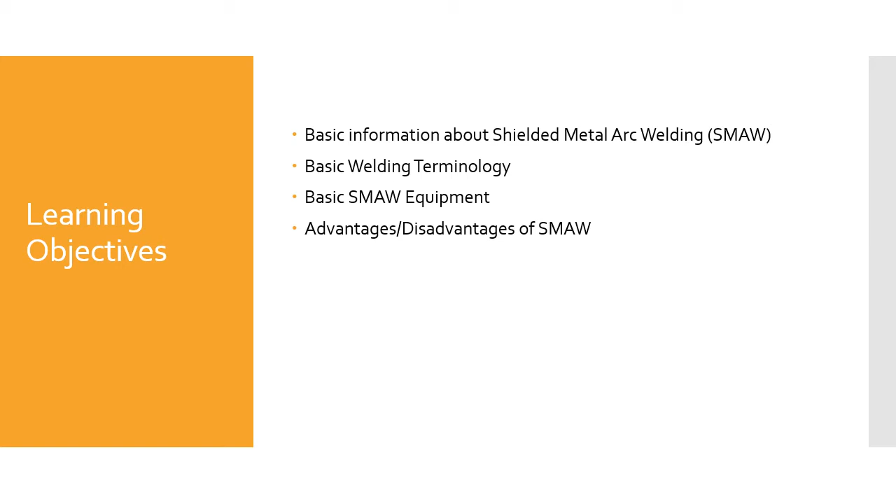The shielded metal arc welding process is one of the older processes. Tried and true, very portable, very easily adapted to a lot of situations for shipbuilding, construction, repair, pipelines, power plants. There are advantages and disadvantages to shielded metal arc welding, but when a lot of people think of welding, this is what comes to mind because it is so versatile and so readily available and so well used as a process.

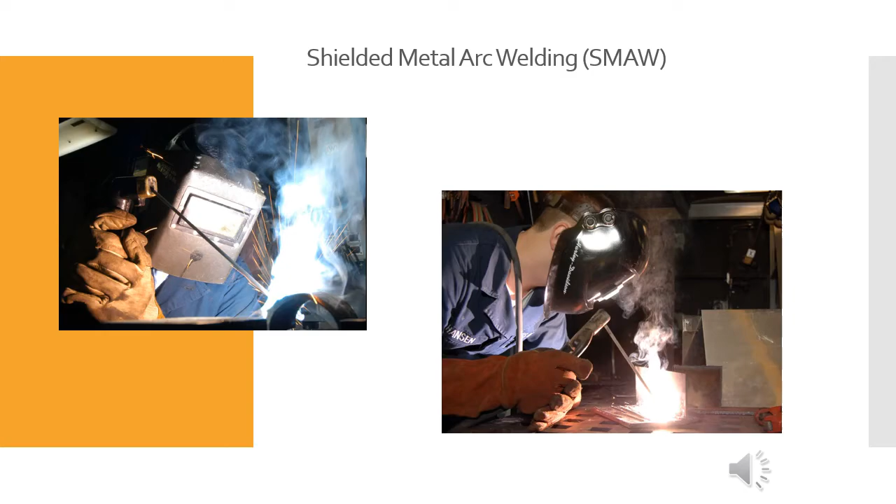Shielded metal arc welding is a manual arc welding process in which heat is produced by an electric arc between a flux-covered consumable electrode and the base metal. The weld pool is protected from atmospheric contamination by a gaseous shield and a fused flux or slag. The gas shielding is the result of combustion and decomposition of the flux.

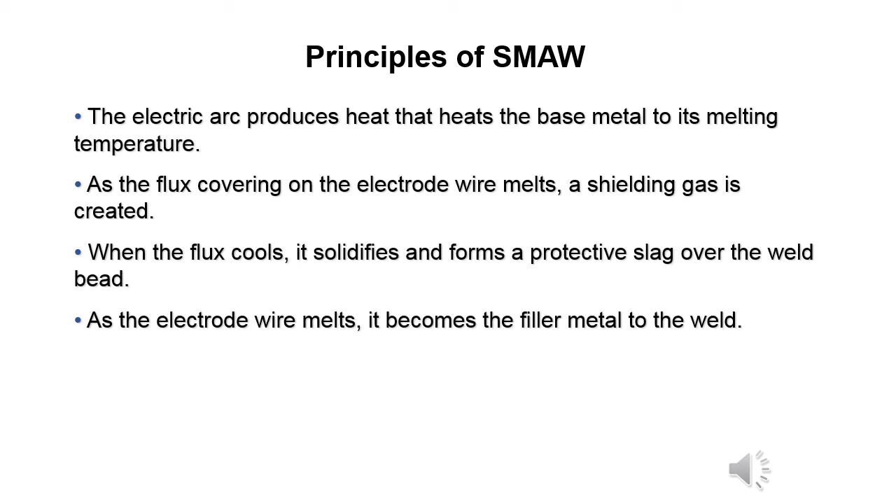At some point when they were discovering arc welding and refining the process, they figured out that wrapping it with newspapers or wood chips or a cellulose-based material would cause a burning, and then when that flux burned, it would kick off an atmosphere, a shielding atmosphere that would keep oxygen and other deleterious materials out of the weld pool. So that's where the fluxes came from.

And then as people got more involved and the process became more refined, the fluxes became more sophisticated. You developed low hydrogen fluxes, rutile fluxes, a whole different variety of fluxes for shielded metal arc welding. And then there were different metals that were going to be welded, stainless steels and nickel alloys. And so there's a wide variety of these electrodes for welding all kinds of different materials together.

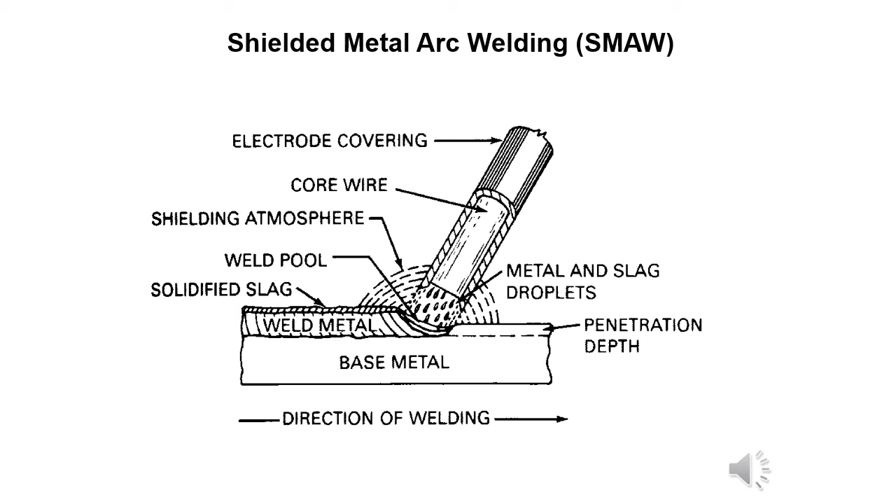Several basic devices are needed to make a manual arc weld. They are the power source, welding cables, electrode holder, ground connection, and electrode. The power source provides the electrical energy to melt the workpiece and the electrode. The power source must permit control of the arc characteristics as required for a specific job.

The welding cables connect the electrode holder and ground clamp to the power source. The cable carries the electrical current from the power source through the arc to the base metal being welded. The ground cable connects the power source with the workpiece, thus completing the electrical circuit. The ground connection must be good to prevent arc blow.

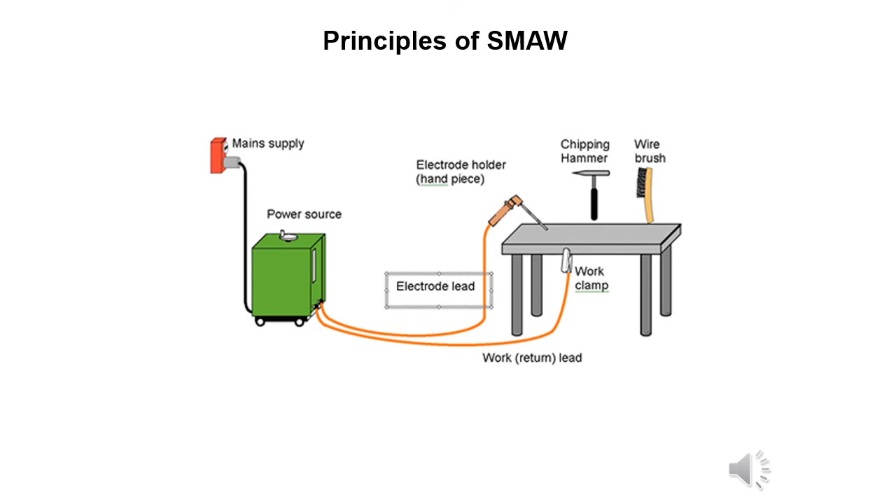The electrode holder is merely a clamping device for grasping the electrode. The electrode is part of the electrical circuit and it is consumed during the welding process. It fills the joint and thereby becomes a part of the weld.

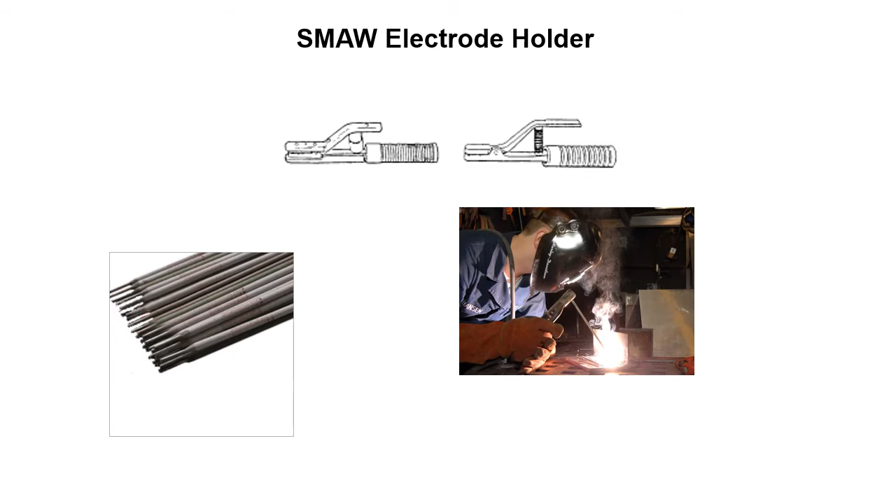Factors that affect electrode selection. Type of base metal. You absolutely have to know what the base metal is before you start welding on it. Nothing will create bigger problems down the road than not having a positive identification of the base metal. This also can drive welders and welding engineer type people absolutely insane.

If you come up to them and say, hey, just weld this, and the welding engineer asks the person who needs it welded, what is this? And the person needing it welded says, I don't know, just weld it. No, it doesn't work. You need to know what the base metal is before you start, or have a general idea. You might not need certified material test reports, but it's a good idea to know what you're welding on.

The metal thickness is another good idea to have, because in shielded metal arc welding there are different electrodes that perform differently on different thicknesses of material. So some are better for sheet metal, some are better for heavy sections of material. Material thickness. Groove design, what's the groove going to look like? What are we trying to accomplish here? The joint alignment, another one. What are we trying to get accomplished here?

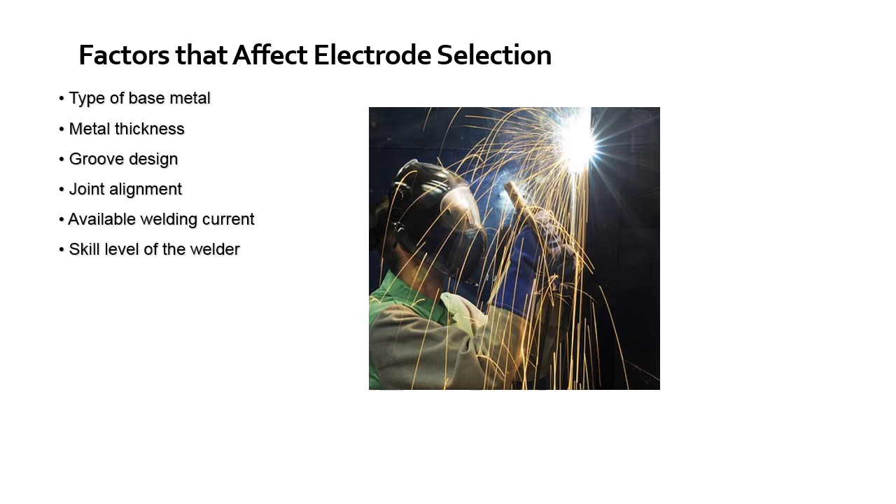Skill level of the welder is also going to affect electrode selection. Not everybody can weld with every type of filler material, so you need to know who you've got working for you and who's going to be doing the welding. Some more factors that affect electrode selection. Welding position. Not all welding electrodes are designed for all positions. So if you're doing an overhead weld, you're not going to be able to utilize a welding electrode that only runs in the flat position. So you need to determine what your position is, and then whether this electrode is suitable for that position.

The rate of weld deposit, do we want something that's really going to have a high deposition rate? What are we looking for? Once again, the position is going to dictate the rate of the weld deposit. You're going to be able to put weld metal in faster in the flat position than in the overhead or the uphill or downhill position. Depth of penetration, what kind of material are we welding on? Is it a sheet metal weld? A lot of times on a sheet metal weld, you might not want something that's going to have a lot of penetration. Weld bead finish, how smooth is the weld bead going to be? What are we looking for?

Impact strength definitely comes into play, especially in industries such as oil and gas or mining, and especially in locations where the environment's going to play a role and you're going to have very cold temperatures. A lot of steels don't react well to really cold temperatures. Well, most don't. It just depends on what the material is. So with impact strength, you need to see how much impact energy this material can absorb before it breaks.

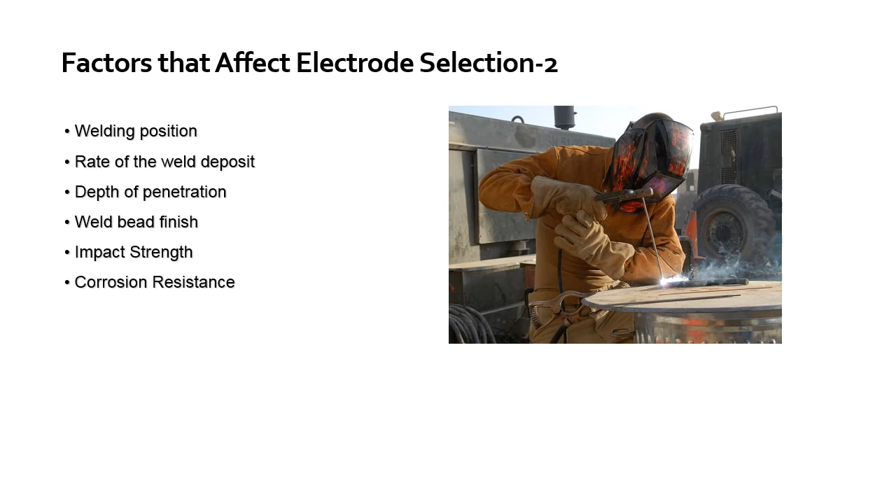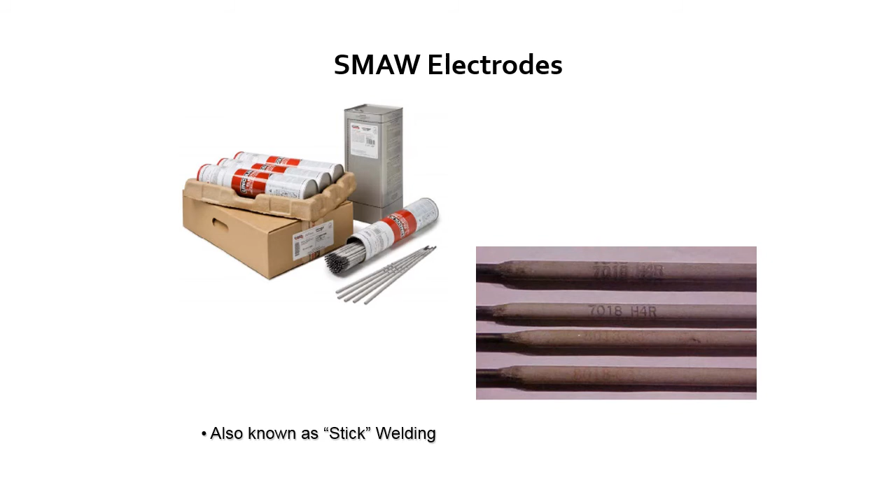Shielded metal arc electrodes continued. The electrode's got to be compatible with the base metal. In a previous slide we mentioned you've got to know what your base metal is. You can't just grab a random piece of filler material and start welding on something. The tensile strength should match up with the base material. What's the end use of this component? So you have to know what your base metals are. Tensile strengths, metallurgically, chemically, all these things need to match up when you're making a weld.

And you might be able to goop some weld in there and get it to stick, but it might not last very long, or there could be cracking problems or whatever. So you need to do your homework, and the electrode needs to be compatible with the base metal.

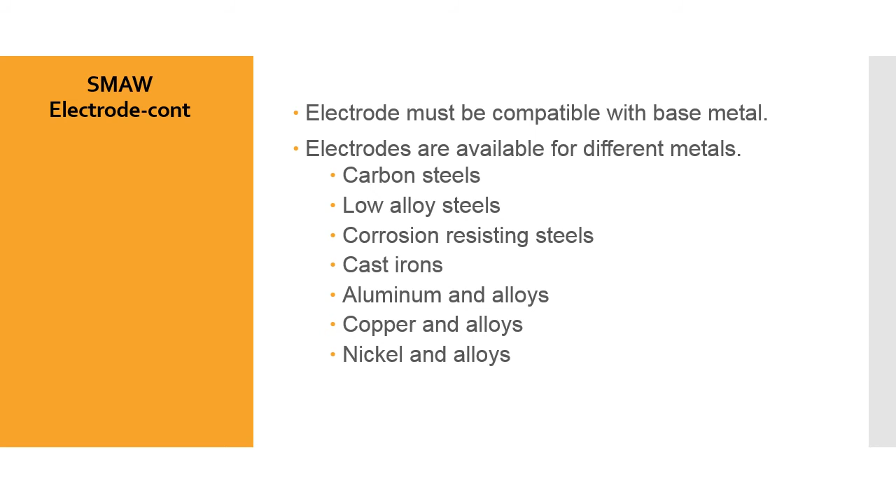Shielded metal arc welding electrodes are available for different metals. Your garden variety carbon steels, your low alloy steels, corrosion resisting steels, cast irons. Yeah, you can weld on cast irons. It can be painful, but there's a whole assortment of welding rods produced specifically for making repairs on cast iron materials. Aluminum and its alloys can be welded; there are shielded metal arc welding electrodes you can use to make repairs on aluminum alloys. Copper alloys and also nickel and nickel alloys are readily welded with shielded metal arc welding electrodes.

As we mentioned before, there's going to be a layer of slag. When you're done making a weld pass with shielded metal arc welding, there's going to be a layer of semi-mineral type slag on the surface of your weld bead. So you need to remove that. The methods for removing it are using a slag hammer or a slag pick, possibly a grinder, and a wire brush. These are the tools of the trade for slag removal.

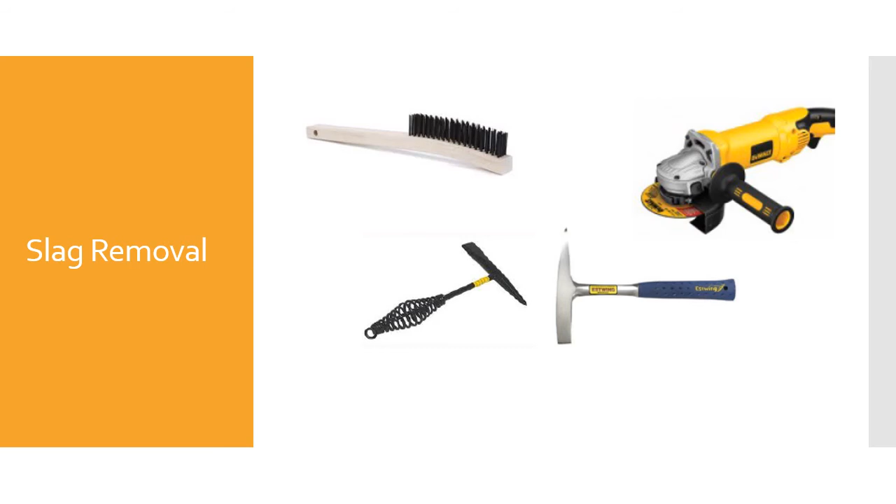A pneumatic chipping hammer or chipping gun is sometimes used, but for the most part, these are the tools of the trade for removing slag. So you can get final inspection done, or if you've got another weld pass to put on, you knock all the slag off with these tools and prep the weld for another pass of weld filler material.

The advantages of SMAW: the equipment is inexpensive. For a few hundred to a few thousand dollars you can have shielded metal arc welding equipment. Put it on the back of a truck depending on what you want. The equipment's portable, not very big, from the size of a small beer cooler to half the size of a refrigerator.

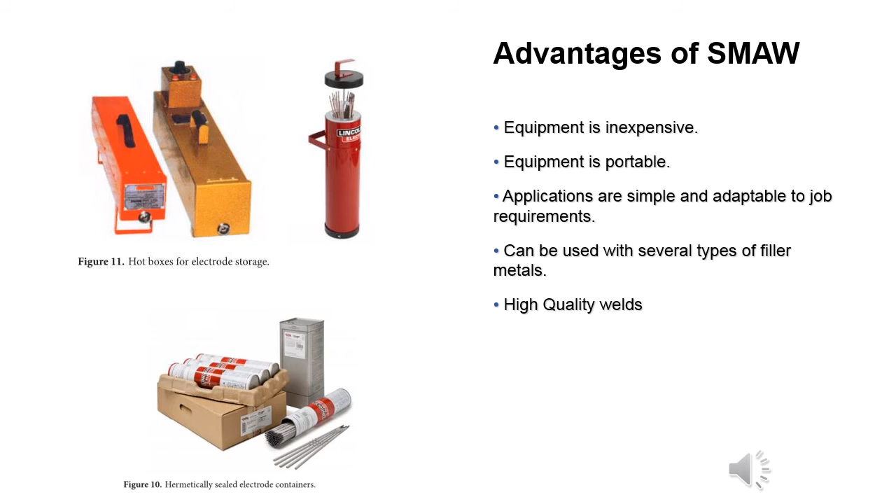Applications are simple and adaptable to the job requirements. You can use them with all kinds of filler metals: carbon steel, stainless steel, nickel alloys, hard facing rods. There are numerous variants you can use, and you can make some really high quality welds. A lot of x-ray quality welds on pipelines and power plants and nuclear situations are done with shielded metal arc welding. Very versatile process.

Disadvantages of shielded metal arc welding. It's a really good process, but like anything else in life, there are going to be disadvantages to it. The disadvantages of shielded metal arc welding: it requires slag removal. So your protective slag that you were using to provide protection from the atmosphere while you're welding now is a rock hard slag that needs to be chipped off and wire wheeled off, so when you put the next weld bead on, you don't have slag inclusions when it goes to get x-rayed or ultrasounded.

Harmful gases can be produced when the flux melts. There's all kinds of research being done on the effects of welding smoke on human physiology. I'm not going to get into that here, but it's something you need to be cognizant of if you're going to be welding. Ventilation is key when using shielded metal arc welding. There's a whole industry of people that make smoke suckers to suck up the bad materials that are in the smoke. Changing electrodes can slow down the process. This gets back into chipping off the slag and putting another electrode in.

Low deposition rates. It's just a slow process, but if you need high quality welds or a certain mechanical or chemical property in the weld metal, this might be your way to do it, but it's going to take you a long time to do it.

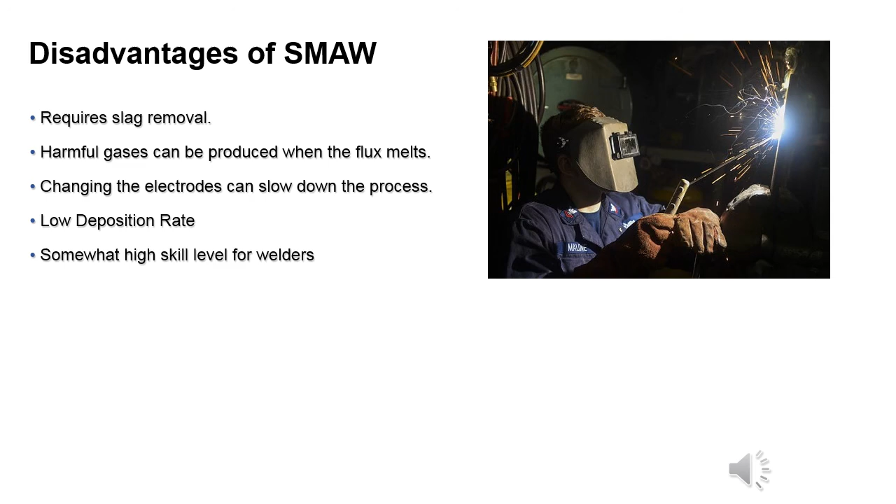A brief summary here of the shielded metal arc welding process. SMAW is the most versatile welding process and least costly of all the welding processes. It is an all-position welding process when the proper electrode diameter and type of electrode are selected for different positions. Shielded metal arc welding can be applied to most metals except those with low melting points such as zinc, lead, and tin. The process has a couple of major disadvantages: low productivity due to the limited length of the electrode and the necessary deslagging of every weld pass.

But other than that, it's a pretty strong welding process, which is why it's used worldwide. Pipeline, shipbuilding, construction, you pick it, you're going to see it. You're not going to see it too much in making cars due to the speed and the slag issues, but it's a very solid weld process that has a lot of different uses in a lot of different industries.